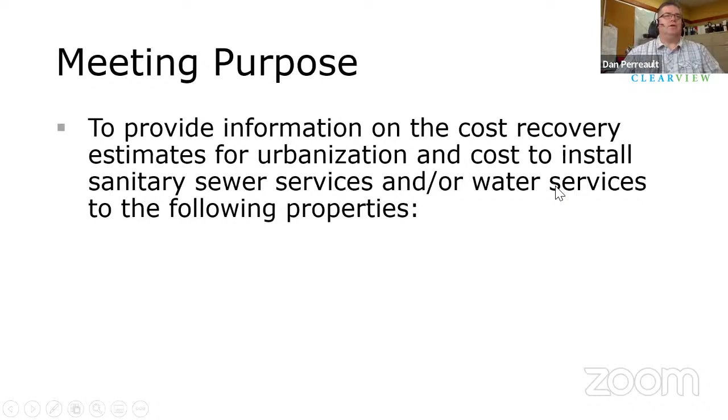The purpose of the meeting is to provide information to the residents on the street for cost recovery estimates for the urbanization, which include curb and gutter, plus sidewalk and storm sewer, and also the installation of sanitary sewers and servicing to the properties, plus replacement of water main and water service to the properties.

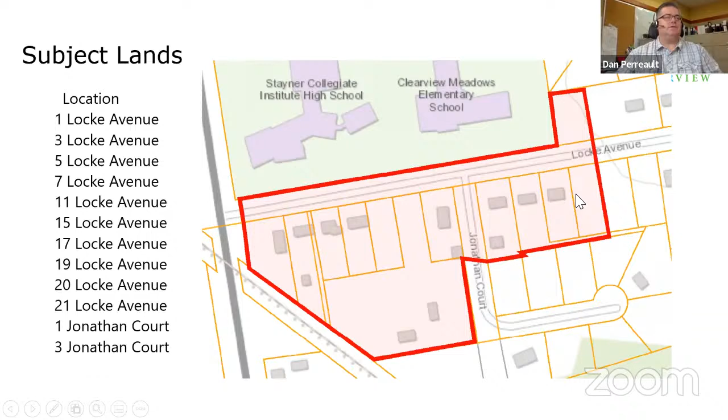Those properties include what you see on the screen, outlined in red. They are the properties on Locke across from the schools, the high school and the elementary school, and properties just east of Jonathan Court.

When the township does these types of projects, we look at certain acts and policies that allow us to proceed. One is the provincial policy statement, which sets out the importance of clean water and wastewater for properties within an urban boundary. We'll get into this later, but Section 391 of the Municipal Act does permit a municipality to impose fees to recuperate a portion of the costs to install such services.

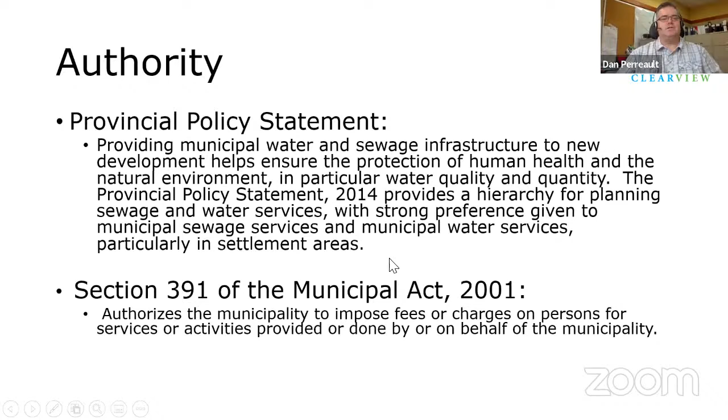I'm going to pass this over to Mike right now. Mr. Rawn is very familiar with the municipality, having been here for several years, and this has been looked at in the past - this is just another piece of the puzzle. Sure, thanks, Dan. In two weeks' time it's 25 years, so I've been around a while.

For those watching, if you're familiar with the area, you're from the area. The area shown here is all existing lots. Used to be on the north end of Locke Avenue, Township of Nottawasaga, and south of Locke Avenue was the town of Stayner. So when amalgamation happened, this all is now in Clearview Township and within the Stayner settlement area. The Stayner settlement area boundary runs right up to the 2728 side road.

That's the first main road north of town that goes past the Public Works facility. It's now County Road 96. But this area, years and years ago, there was a push to develop all of this area with water and sewer. It went to public meetings, and it was voted down.

Now, the way the provincial policy statement works - we have the Clearview official plan, as Dan said, and the provincial policy statement - as we grow, we have to service within the settlement area, we have to service everything with water and sewer. Now, this is kind of a unique spot here.

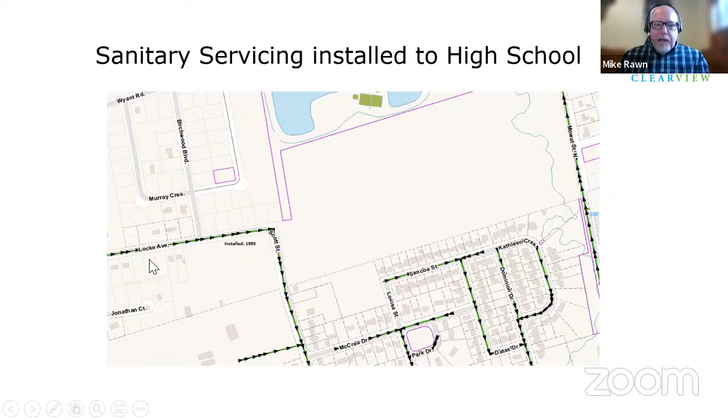Going back to that other slide—because there is one pipe that's going to benefit this entire area, the money we take in for charging to connect to that pipe will go to benefit this entire area. So when you see the sewer costs that we're going to put in the servicing bylaw, you're not paying 100% of what it would cost to put sewers in here. There is a shared benefit from the existing pipe that was put in.

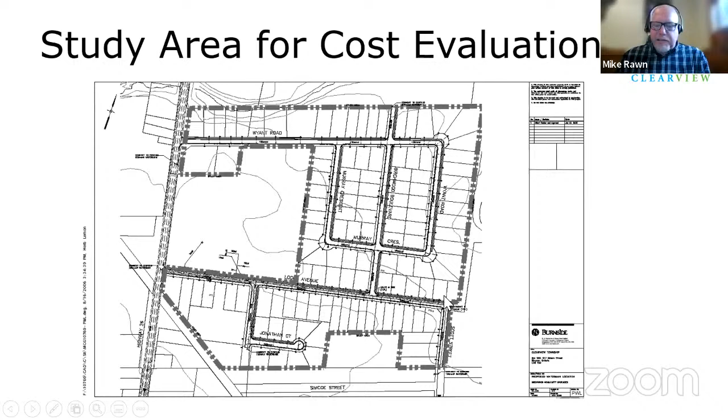At the east end of Locke Avenue in 2018, we did a servicing bylaw there, and it's the exact same concept, the same financial plan. All of these homeowners from lots 32 up to 42 all paid for water and sewer services, and the money they've paid for the sewer services is going towards servicing this entire area with sewers—again, benefiting from a pipe that Stayner Collegiate had installed many years ago.

So you see where the water line stops on Locke Avenue—the blue line is the water line, and you can see the little red and yellow, that's a fire hydrant. The developer, Emerald Creek, has to carry the water main from there down to where we're building it and then up to their subdivision.

I think that's about covers it. Thanks—it's weird, I feel like I'm on TV. Thanks, Mike, appreciate it.

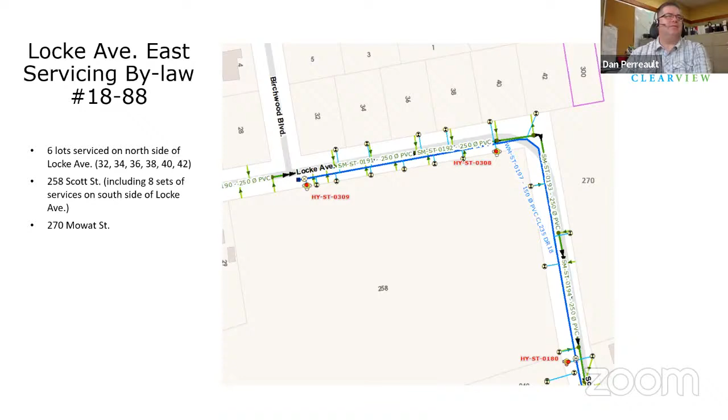Urbanization means new curb and gutter on both sides of the road, with storm sewer installed. New sidewalk would be installed on the south side of Locke Avenue, all the way down to Jonathan Court. There's going to be a realignment or reconfiguration of the sidewalk.

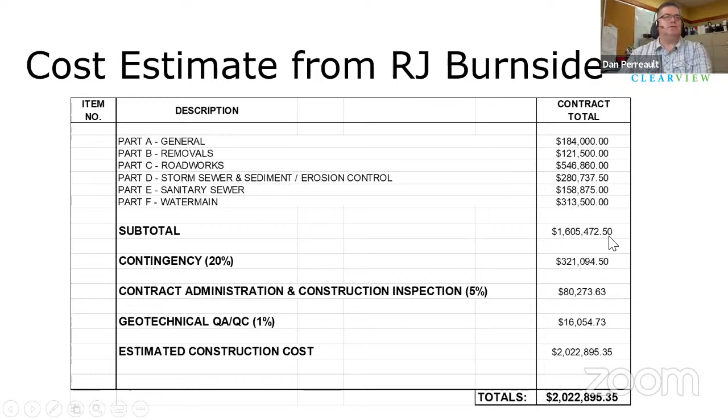So here's a cost estimate. Like Mr. Rawn said, the subtotal for the works is about $1.6 million. There's some contract admin and some geotechnical requirements, but there's also some contingencies that we'll talk about later.

For the construction cost recovery, based on the cost estimates we've received, each resident will be charged $287.42 per meter for frontage, plus $2,000 for sewer service lateral. For water, it's $311.90 per meter, plus $2,000 for water services. Properties that are currently connected to the municipal water system are not required to pay this, because those replacement costs are built into the rates, so that when we do come and replace water mains, those properties will not be charged for that.

And then there is a proportionate charge for urbanization, so it's the cost for the storm sewer, the curb, the gutter, sidewalk, etc.

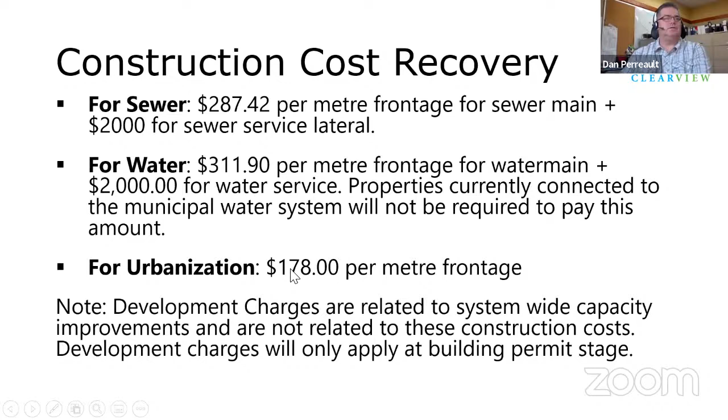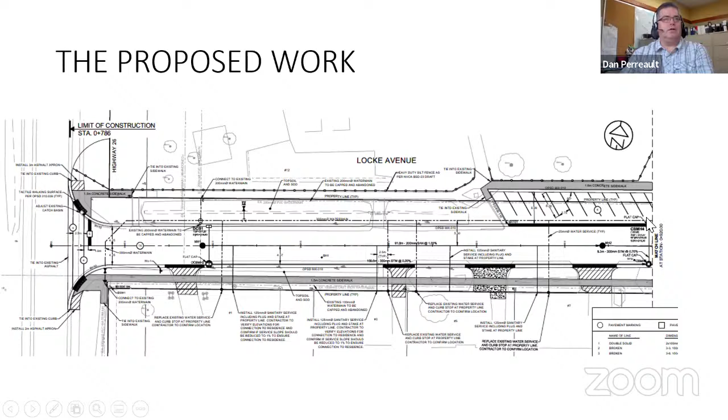I might just go back to here, that as part of the project we are not only installing new sanitary sewers along this location, we are replacing the water main along here as well, up to Jonathan. There is a water main that comes up here and services the school and this area over here, but there's no water main past that. We are installing new water main across here and connecting to the water main at Jonathan and Locke.

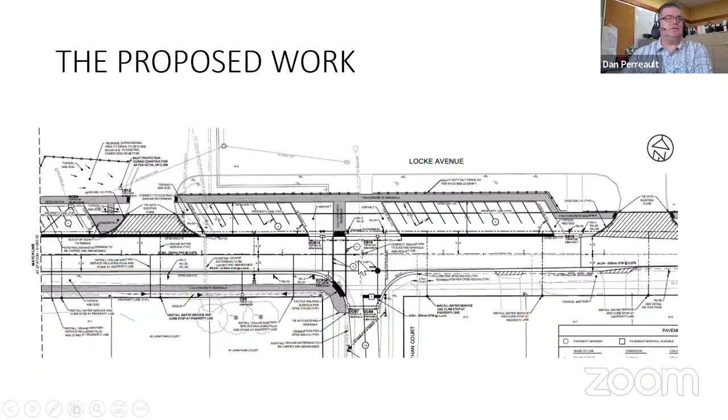Properties that would require connection to the new sanitary sewer are 1, 3, 5, 7 Locke Avenue. They all have 25-meter frontages. They'd be charged the sanitary sewer and urbanization, but not the water main portion, because they're already connected to water.

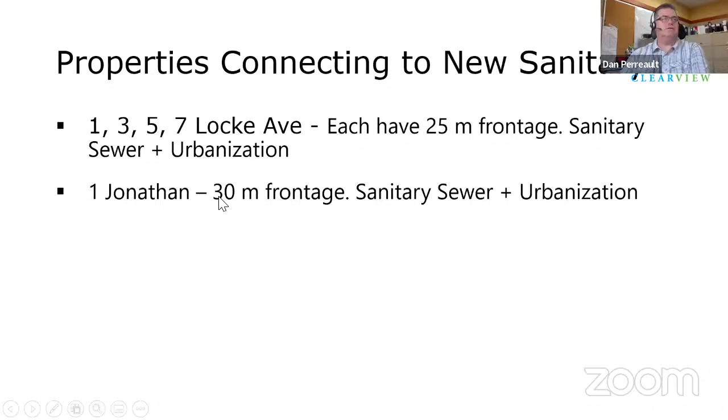And then number 1 Jonathan, which is at the corner of Jonathan, the southwest corner of Jonathan and Locke. They have a slightly larger frontage along Locke, so their frontage is a little bit bigger.

Properties that are required to connect to water east of Jonathan are the 5 lots east, to the limits. Again, these properties have 25-meter frontages. These 2 properties have 30-meter frontages.

They will also be required, like Mr. Rawn had indicated, because the sanitary sewers that were installed a number of years ago - these properties were never charged a connection fee at the time. They will be at this point.

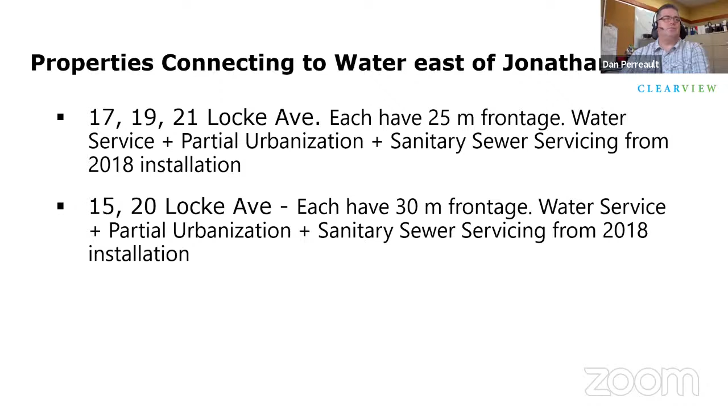There are 2 properties we've kind of pointed out. 11 Locke Avenue is currently a vacant parcel of land. They will have both sewer and water services installed to the property line. And number 3 Jonathan Court, there is a potential for a lot creation in the future with the installation of municipal services. That potential lot can be created once those services are installed.

So they will have a combined service charge of sanitary, water, and urbanization, and both those properties have 25-meter frontages.

This is probably what everybody is interested in, what their property or lot would be charged at the time of installation of the services. So you'll see here the addresses for all the properties.

For example, 1, 3, 5, 7, a 25-meter lot frontage, would be charged $287 per meter, plus a $2,000 sewer lateral charge, and $178 per meter, for a total of $13,635.50.

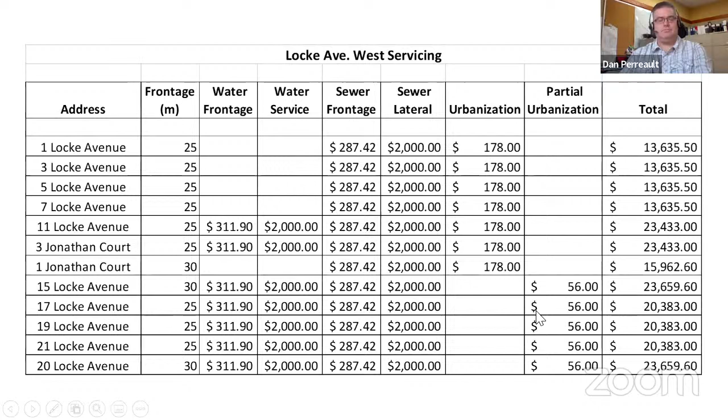As Mike had indicated, the total amount we would be collecting from the benefiting landowners, all those properties I've gone through, will contribute $225,000 toward the $1.74 million total. That 1.74 doesn't match up with the cost estimate because we have not included the contingency. We feel that the municipality, based on what the tender amount is going to be and the contingency built in, can absorb that contingency if it happens or comes.

In the 2022 budget, council has allotted certain funds from our different budget areas to go towards this project. $405,000 will go from our water budget, $648,000 from our roads budget. A few years ago, council initiated a $250,000 urbanization reserve, so we are going to use $250,000 from that reserve for this project, and $211,000 was budgeted in our sanitary sewer budget.

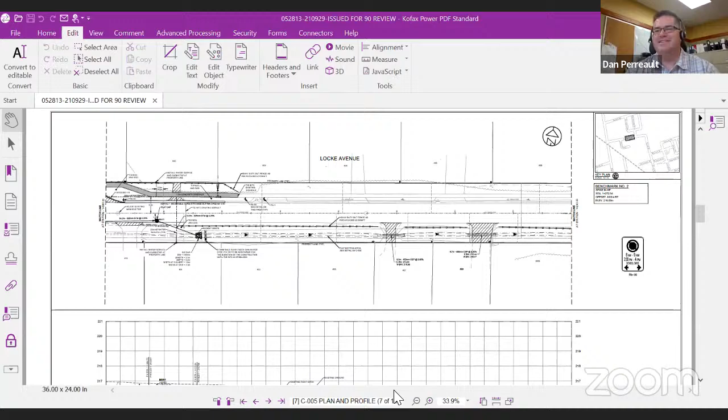Yeah, I'll bring that up again here a sec, hopefully we can. I'll share that drawing here again. Can you see the drawing? I can. Okay, I'm uncertain what people can or can't see, so I'll zoom in here.

You're the owner of 21? Correct. So the storm sewer will come along here, there'll be a manhole out front. This is a pipe that would be underground with an outlet here.

Now, good thing RJ Burnside is here, so this is a great idea to come on and maybe see if we can make some adjustments. There's a potential that maybe we can shift this down if it works. I might have to call on Jennifer or Rachel, but if we don't have an answer today, we certainly could give you an answer. This is the end of the storm sewer, and this is a pipe underground to an outlet area here.

So a driveway or something could be fit into a certain location on your property as well, probably with a bit more flexibility if this could be moved further to the east.

Does that make sense to you? Oh, it does, absolutely. Yeah.

I suppose this brings up a lot of questions. I had a conversation the other day with Christine Taggart at planning as to what I can do with this property, because I didn't have sewer and water. So I was in a waiting pattern here until something happened, and I would like to develop the property as soon as I can. These sewers and water going in this summer, that's fantastic. But

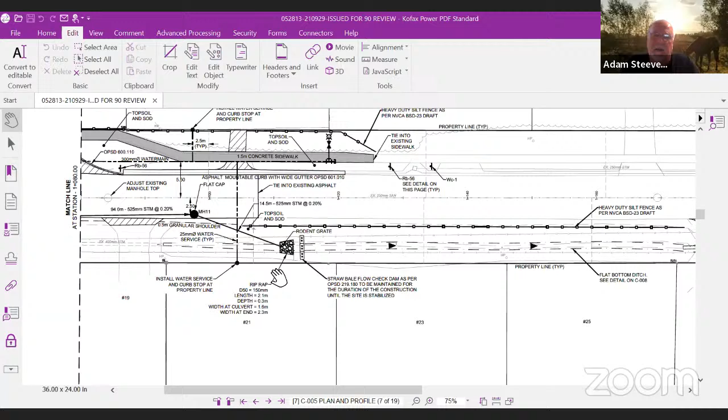It's what the council, what everybody wants, is what I'm willing to work with. Like if you guys want me to put 2 single family there, that's fine. If you want me to put a fourplex on there, that's fine. I'm open to all of that, but we should get the laterals and water in that are going to be according to what you guys want me to do there.

Yeah. So again, well, if I can, Dan. Yep. So we've done these a number of times. You know, 20 years ago, we did the whole village of Creemore and everyone paid this, what we're talking about for frontage, for anybody that's listening. It's the same that it has been for 30 years.

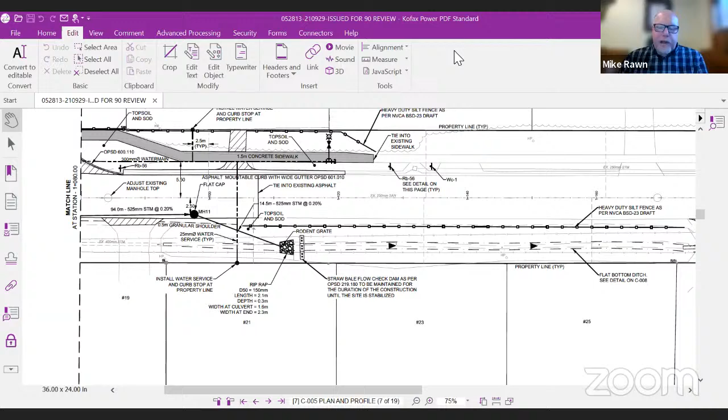The pipes go in, and everyone pays the frontage in front of their houses, whether it's storm pipe, sewer pipe, or water pipe. Then everyone pays for their individual connection. The lateral is the sewer pipe that comes from the main to the property line, and that's $2,000 or $3,000. It's been the same forever, so right up until construction is complete, adding another lateral is the price of the lateral, $3,000 or $4,000.

I'm not going to speak for the planning department, but typically what I've seen here for a number of years is they like to keep the neighborhoods looking the same. Probably two houses on a lot that big would be very reasonable in Clearview. Again, that's up to you and the planning department, but I would certainly support putting an extra set of services in there from the public works department.

Okay. Yeah, so sorry, just to interject, I would suggest some type of pre-consultation, just a quick meeting with planning and myself, within the next few weeks would probably be best. I think it's probably beyond the point of changing the tender and all that stuff we have prepared, just for a bit of a change order once it's awarded. Again, not anything critical at this point, but...